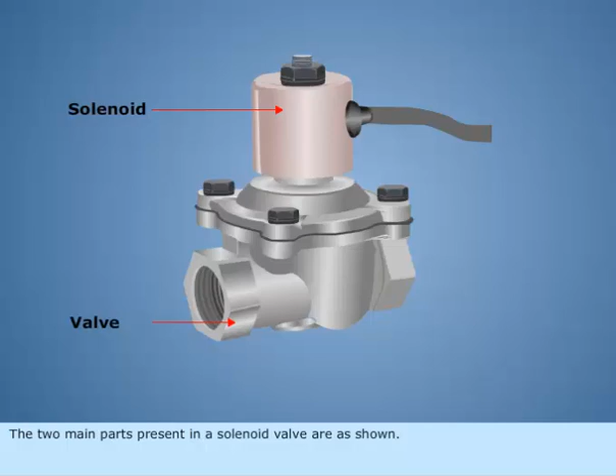The two main parts present in a solenoid valve are as shown. The solenoid changes electrical energy to mechanical energy, which in turn makes the valve open or close mechanically.

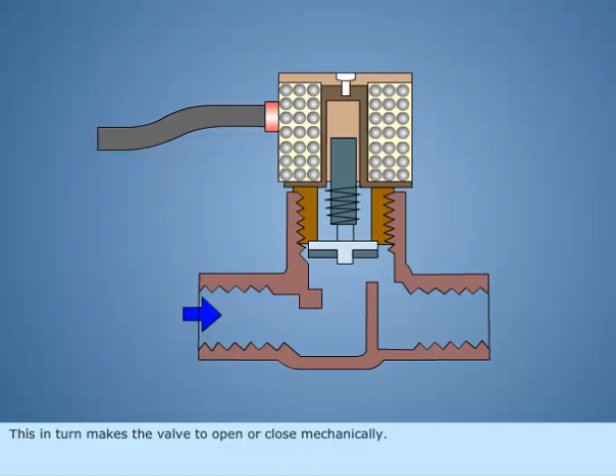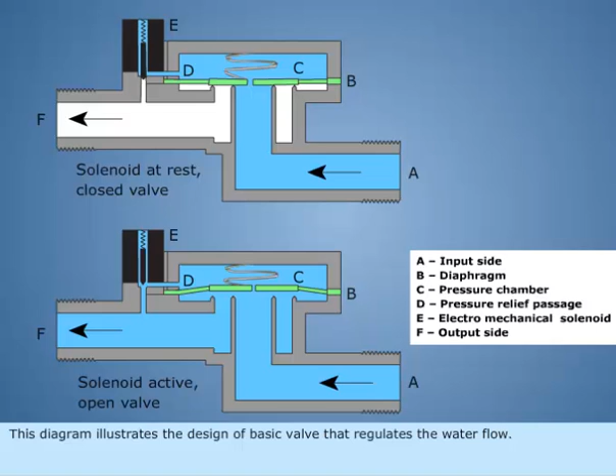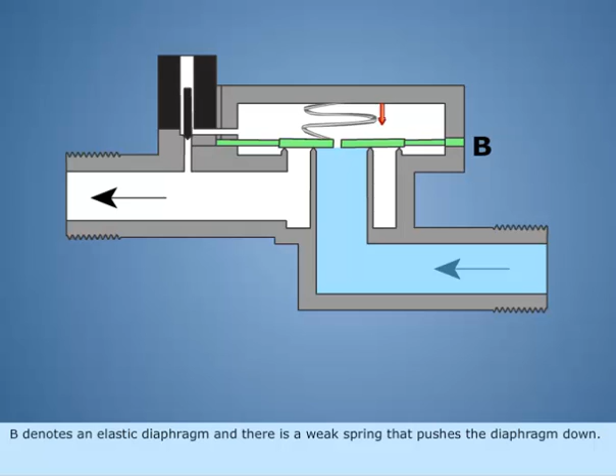This diagram illustrates the design of a basic valve that regulates water flow. The water under pressure enters through section A. B denotes an elastic diaphragm, and there is a weak spring that pushes the diaphragm down. There is a small pinhole exactly at the center of the diaphragm.

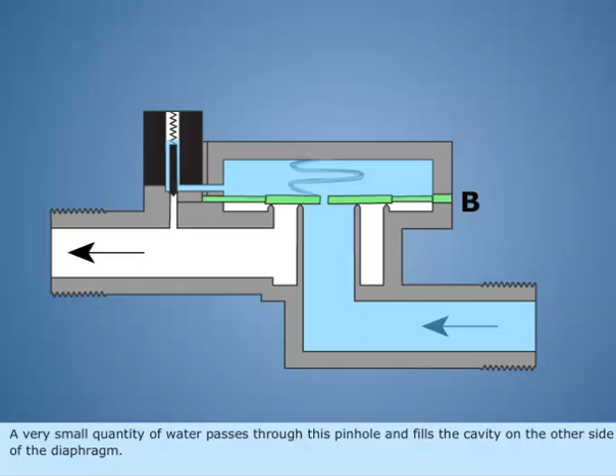A very small quantity of water passes through this pinhole and fills the cavity on the other side of the diaphragm. This is to keep the pressure on both sides of the diaphragm equal.

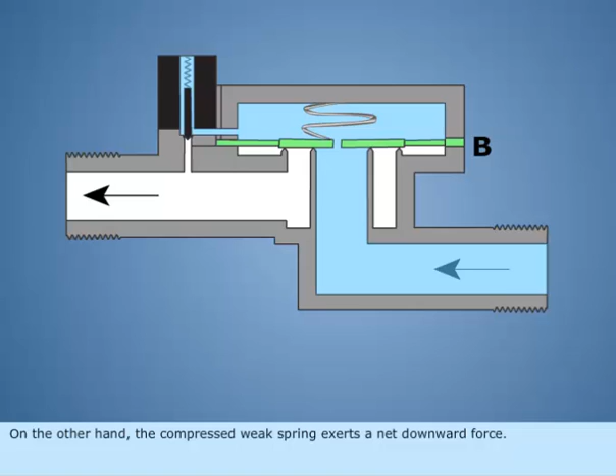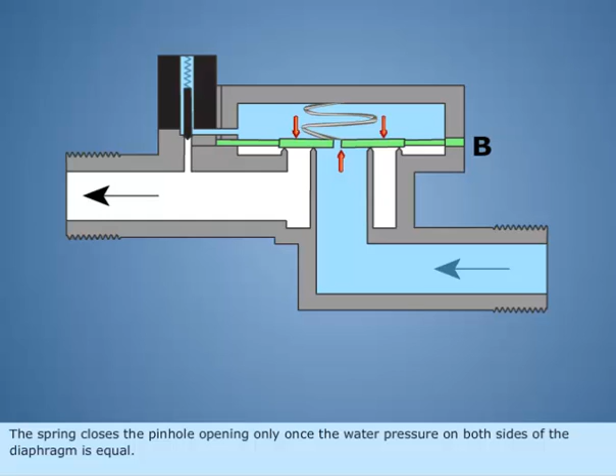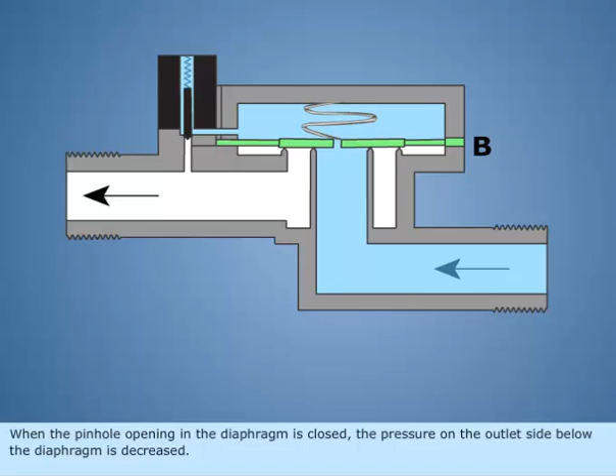On the other hand, the compressed weak spring exerts a net downward force. The spring closes the pinhole opening only once the water pressure on both sides of the diaphragm is equal. When the pinhole opening in the diaphragm is closed, the pressure on the outlet side below the diaphragm is decreased. Hence, the high pressure above the diaphragm firmly closes the valve.

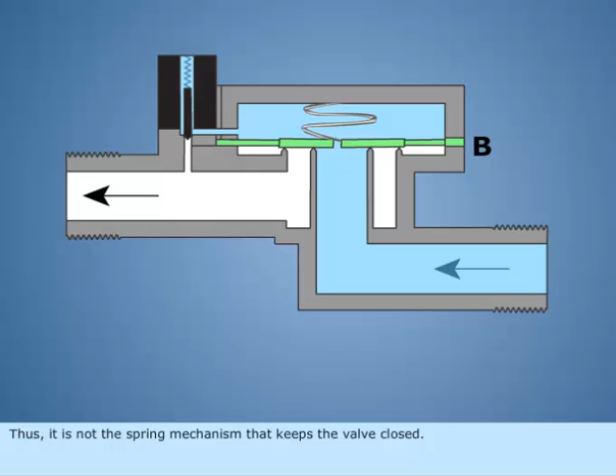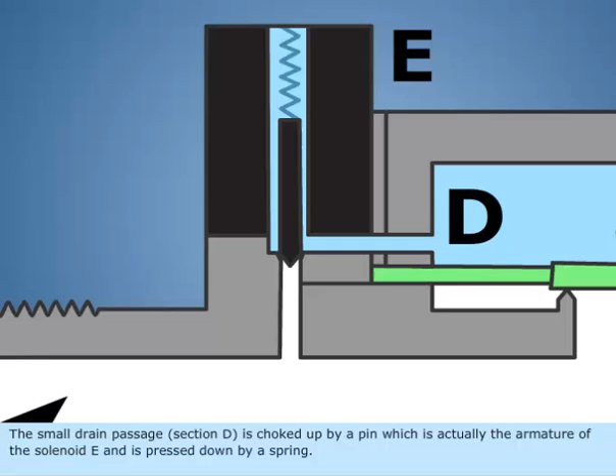Thus, it is not the spring mechanism that keeps the valve closed. The small drain passage, section D, is choked up by a pin, which is actually the armature of the solenoid E, and is pressed down by a spring. All of the actions of the diaphragm discussed above are due to this blockage.

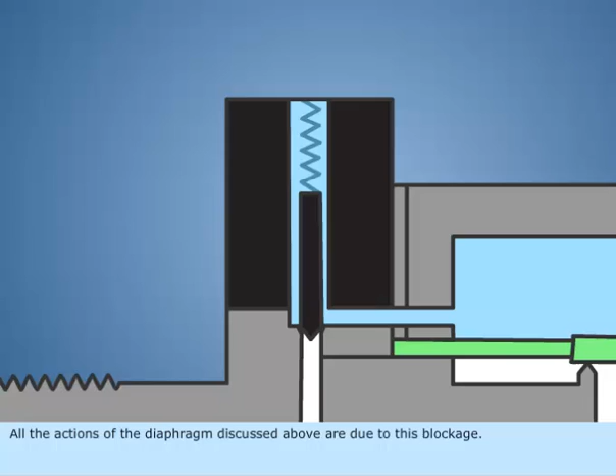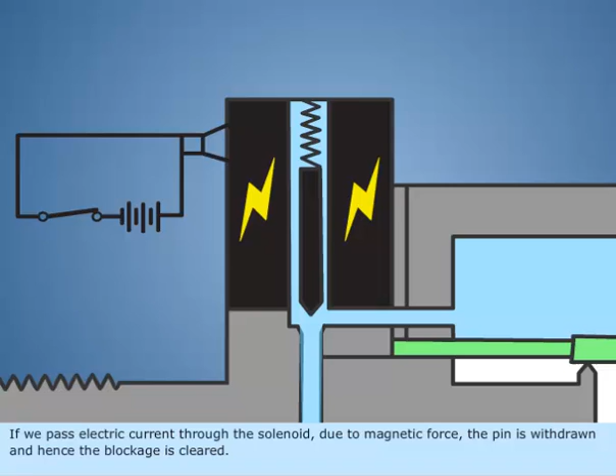If we pass electric current through the solenoid, due to magnetic force, the pin is withdrawn and hence the blockage is cleared. Thus, the water in chamber C comes out through passage D quicker than the pinhole can refill it.

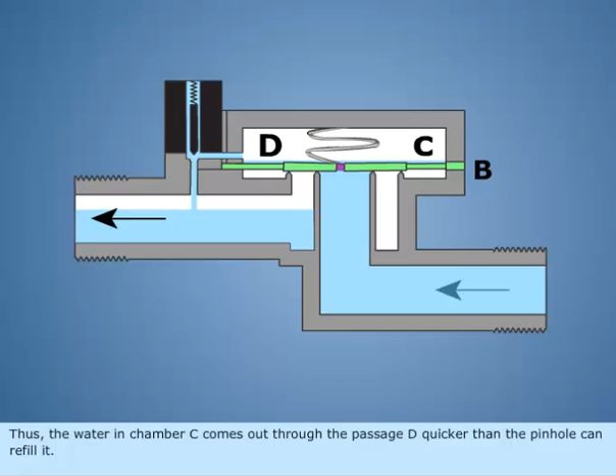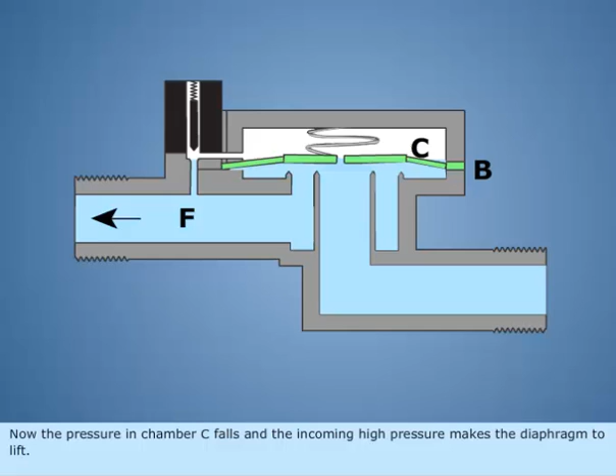Now the pressure in chamber C falls and the incoming high pressure makes the diaphragm lift. This in turn makes the main valve open. Now pressured water from A flows directly to F.

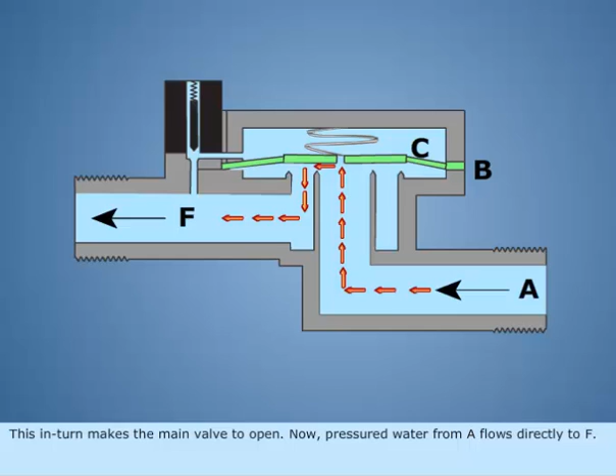Thus you have learnt about the typical design and working of a solenoid valve.